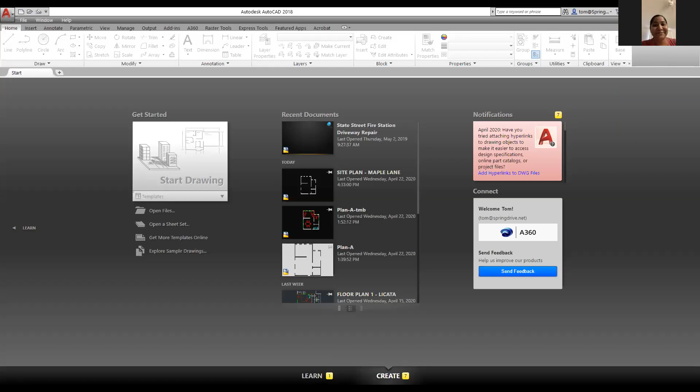Okay, let me ask you a question, Padma. I think you'll know the answer to this. Now let me ask you this, Padma, do you know what a database is? No, sir. You don't? Okay, all right. Well, let me explain what a database is, because if you don't know, then it's probably something that maybe... does anybody know what a database is before I go on with this explanation?

A place that you store data? Yeah, exactly, it's where you store data. You know, don't all jump at once, you guys. And the thing is, it's where you store data. It's kind of like this, let me give you the most simple example. Okay, here it is like this.

What happens is every year, Christmas time comes along, or it comes along in April too, like I just mentioned. But when I am going to send out my Christmas cards, what do I do? Do I go and look through a telephone book and look up all the addresses? That's maybe some old piece of paper thing. Used to do that, but you know what I use now? I use an Excel spreadsheet. And the Excel spreadsheet tracks the information like this.

You have one column that would track the last name, the next column would track the first name, the next column would track the street address, the next column would track the city, the next column would track the zip code and the state, and then the next one would track the phone number. Now, what is that? That's a database. What it means is it's tracking data.

I'm going someplace with this. Now let me explain something to you. When you're working with AutoCAD, AutoCAD is a database with a graphic front end. That's really all that's happening here. So when you're working with AutoCAD, everything is mathematically calculated and presented to you through a graphical front end, but really it's just a database.

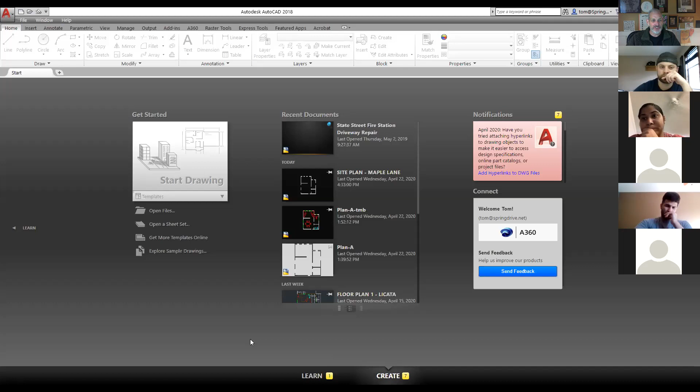So anyway, getting back into this right now, we're going to go ahead and talk about this. So now what we're going to do is we're going to go back out to where we typically go, which is going to be out here. And what I'm going to do is I'm going to go out here to Blackboard. Let me make sure you guys can see this. I'm going to do new share, and I'm going to share to Blackboard. Okay, you guys should be able to see Blackboard right now. Can you see Blackboard right now? Yes, yes, okay, so I think we're seeing Blackboard.

Okay, I'll go out here, and what I'm going to do is I'll start this off the same way you guys have been doing it. Yeah, right there, and I'm going to go here, if I can get there. Yeah, right there. Okay, so what I'm going to do right now is it should bring me up onto this area here. Just give it a second, and it looks like it's kind of, yeah, there we go. So this is what you're going to see right here.

Now you're going to notice right down here, you've got April 22 blocks, and I'm going to do this. I'm going to go ahead and put a little notation on here. I'm going to go ahead and put a highlight on here. Okay, over here you see it says April 22 blocks. That's what we're working on tonight.

So going back to here, I'm going to go ahead and click on this. When I click on that, it brings up the content. All right, and here's, come on, where's the content? Where is it now? Okay, let's see here. Okay, guess I'm going to have to do this. Go back to the mouse and go back to the blocks. Okay, it's taking a second. For some reason the site's a little bit slow tonight.

I can't imagine why, but you've got blocks assignment, and this is actually the same thing, it's a PDF, the same thing I did before. So let me show you what it looks like. So I go ahead and open this up right here, and this is what it is. So first of all, you guys are going to want to download this. Okay, this is what we're going to create. We're going to be creating this right here. This right here that you're looking at is actually going to be like a little 5-page document, and we're going to be making this. This is all going to be done out of blocks, okay? So let me do this real quickly.

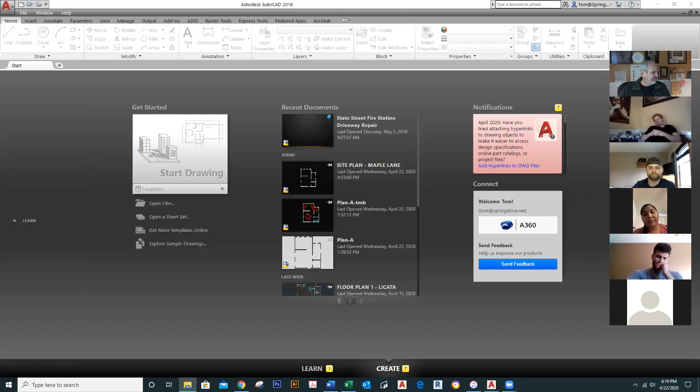So what we're going to do right now is open it. I'm going to open up that file, which should be out here in my downloads. Let me go ahead and grab this if I can, the site plan Maple Lane. Okay, it looks like this. Now, what I've got right now, this information right here - if I click on this, it tells me what layer it's on. It's on the walls layer.

So what I want to do now is insert some blocks. Let's take a look at what I was showing you guys before. If I pull this back up here, if I can find that... it looks like that didn't really find it. So I'm going to try real quickly to get this to download here if it works, hopefully it will. I'm going to try to open that up there. All right, one, two, three, there we go. Go ahead and do this again.

Okay, so there that is, it's still trying to open up there. Now, what we're going to do right now, you'll notice it's got these different items right here. I'm having a real difficult time with this because it's really slow, not sure why, and I can't even open it up. So that's where we're at right now. Shouldn't be, but that's the way it is. Anyway, so this is what we're going to be working on. This isn't even showing up yet, so that's just going to have to wait for a second here.

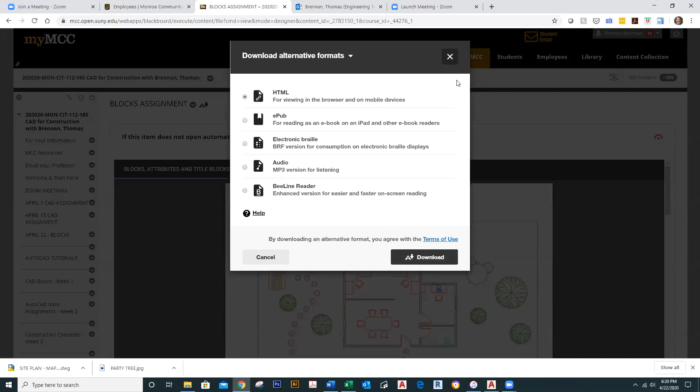So what you're seeing right here, we'll just start with a real simple part, which are these windows. You see it's got windows around the edges here.

So let me talk about what a block is. First of all, a block is something that allows you to put information into a drawing repeatedly. What this means is that you've got the ability to insert, let's say, a piece of furniture, or a door, or a window, or something else.

And these blocks are actually manufactured by companies. When I used to work back in Michigan for a hospital called Beaumont, which has about 1,000 beds, so it's really big - a lot bigger than Strong and Highland put together. It's really huge, the largest single campus hospital in the country. And I used to work there, and one of the things we used to do is lay out furniture.

So when you lay out furniture, one of the things you do is you put in blocks. Now I talked about blocks a little bit for you guys, but now we're going to get into actually how to make these work and how to insert them and so forth. So let me show you how this works.

So getting into blocks right here, I'm going to get into this. And as I get into this right now, I'm going to go down to here and back. Can you guys see AutoCAD right now?

Yes. Okay, so what I'm going to do right now is I want to insert this. Now, please notice that whenever you're working with AutoCAD, one of the things you want to do is always be mindful of your layers. And the reason why is your layers allow you to keep the information as it should be. Now, let me show you quickly what an object, what a particular item could be, as far as a block. A block can be anything you want it to be, but let me give you an example here.

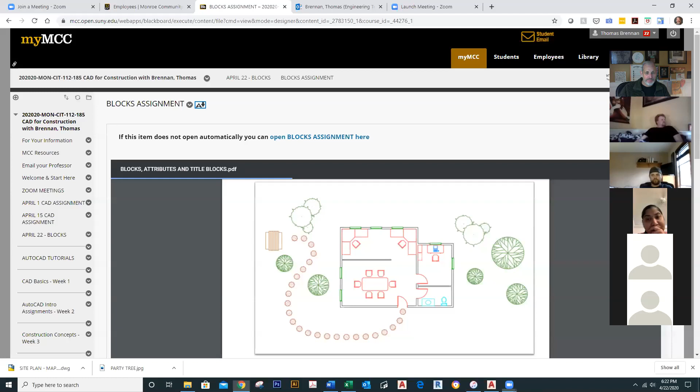Let's say I was laying out furniture right now, and the furniture I was laying out was actually going to be for Steelcase. So what I'm going to do is go out here and share something else. I'm going to do a new share, and go out here... let's see if I can grab this. Can you guys see Google right now?

Yeah, okay. So I'm going to type in here - this is actually going to be very instructive - Steelcase blocks, Steelcase CAD. Okay, so we got a Steelcase CAD. Now what's going to happen right now, this is what we used to do before. I'm going to look for a CAD file, and this CAD file is going to be any particular thing that has to do with Steelcase furniture.

So this is what we used to do. I'm just going to go to task and vintage, task and visitor seating, and I'm just going to go ahead and choose gesture. Let's see what this looks like. Okay, I've got these right here, standard. Can you guys see these chairs here? Yeah.

Okay, so I'm going to go ahead and open this up, and what I'm going to do is download this drawing right here. See, it says CAD symbols - I'm going to go ahead and download a CAD symbol. And it just came in down here, so I've got that right down there, 717 and some change.

And now if I want to insert that into my drawing, I can do that by just going back. Can you guys see AutoCAD now? No. Okay, let me go back to new share and go back to here. Can you guys see AutoCAD now? Yes.

Okay, so what I'm going to do is go ahead and insert that. So to do that, I'm going to grab this and pull it into my drawing. Now watch this - I drop it in, and right there you see it. Boom. Okay, now there it is right there. I just went ahead and inserted that, and that is now in the drawing right there.

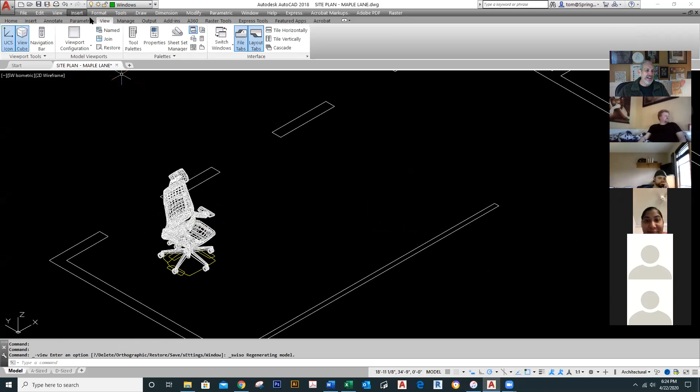And I'm going to just go ahead and take a look at it, Southwest isometric view, and there it is. Boom, pretty cool, huh? So at that point right now, I could actually go and change the visual style and take a look at this as conceptual. When I do that, it gives me that look right there, so that's a 3D item, showing this particular chair to me in 3D.

Now, so what's the big deal? Why is this important? It's important on a lot of levels because first of all, I could use this particular block, which is a standardized block that Steelcase themselves put together. So when I lay it out, it's going to be the actual furniture measurements, actual perfect measurements and configuration like you see right there. So that's what we have.

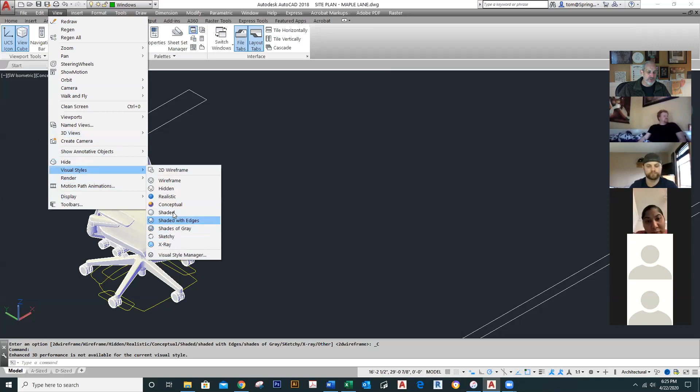Okay, now the next thing I'm going to do right here is go a little bit further in the visual style. I'm going to go to realistic if I can do that. Yes, I've got that, and there's a few different ways I can look at this, but for right now, that's what you've got right there. So we've got that, and this information right here is now available for me to use.

So what's the big deal? Well, the great thing is I can just go ahead and use this over and over again. So if I want to put this in my drawing, I put it in, and look at this, I can actually take it and rotate it. Kind of cool, rotate the chair around like that. I'll go ahead and grab this, put another chair right here, and rotate it around like that. So what's the big deal? Well, the big deal is that this allows me to have great flexibility, the ability to scale and rotate these items as I put them together like that.

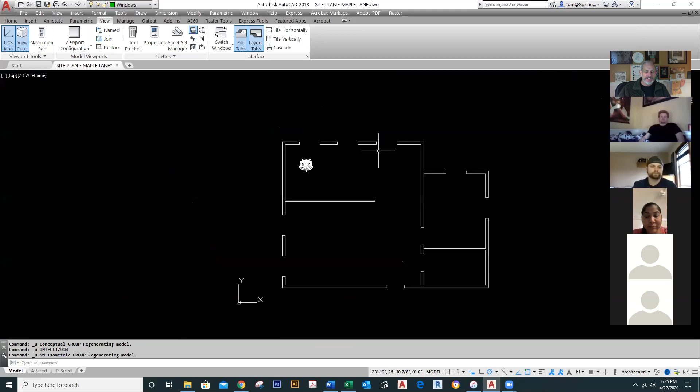So anyway, that's what a block is. We're working with 2D, so that just gives you an idea as far as what 3D would do. I'm just going to step backwards a little bit here, go back to here, and now we're back to there. So what I saw is I could do that. Now that I have some idea what a block is - a block can be any number of items all combined together that could be used in a drawing - the examples I gave before are windows. In the last project we worked with, I actually gave you guys some window blocks, and I also gave you guys some other items right there. So we're going to work with blocks right here, and then we're going to look and see how to make them into attributes. So let me show you something else right now.

So now how do we do this? Well, first of all, you'll notice right now that I've got windows as my current layer, and that's cool. I'm going to go to the insert tab right here, and go to insert. Now look at this, when I go to insert you're going to see there's a number of different items here, one of which is window. Okay, so watch this, I'm going to click on window.

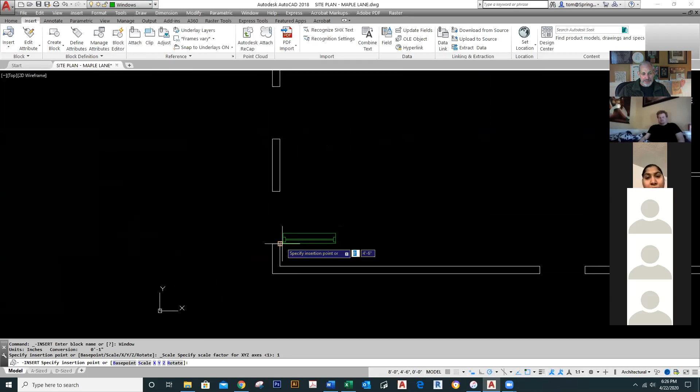I'm going to pull into here and place it right here. Notice I'm snapping to that because I've got my object snaps on. So I click there, and then I can rotate it - it lets me rotate it in any direction I want to. I just want to rotate it up in this direction and click. Now once I've done that, boom, that is in place right there. That was easy to do. So I went ahead and did that.

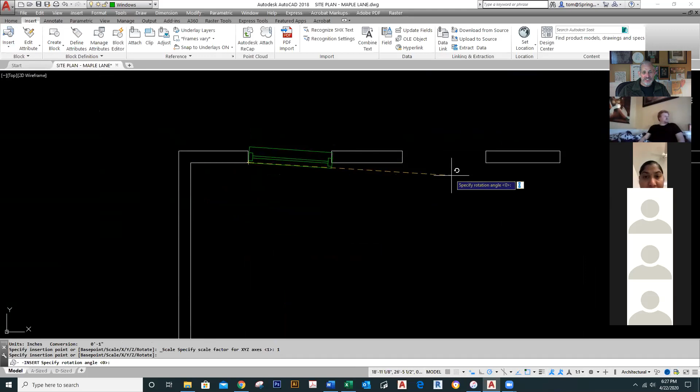So I'm going to go ahead and repeat that. Go back to here, insert, window, do the same thing right to here, click it there, pull it up and go there. So this is how I begin to put the windows in. As I'm doing this right now, it's all up here under insert. Go to window again. Now this one, I'm going to click, and now it's asking me for rotation. Let's go ahead and snap it over to the side here so it stays straight there. And this is how we go ahead and put this together.

So you have the ability, as you're putting these elements in, to go ahead and place them. AutoCAD allows you to place them, as I'm doing right here, just placing them in a row. Okay, so I got those, then I got another one, insert. You could also use the copy tool. I'm going ahead along here, putting that in place. And then I got one more down here, insert, and insert this window. I'm going to put this one in like this, click on it there, and then pull it down like that.

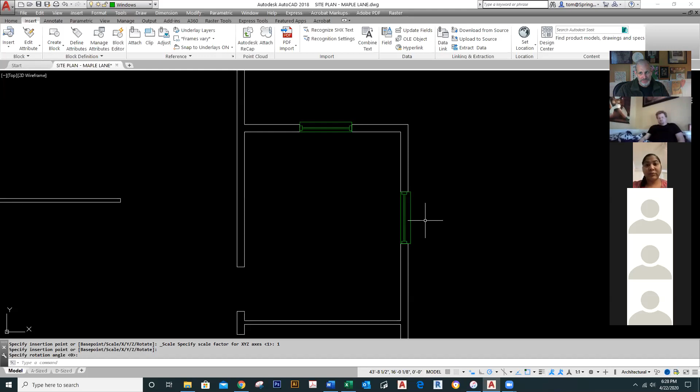Now, what I did right here is I left the longer portion sticking out. That could go either way. In this case, I'm leaving them there as if they were like a window head, like the architectural feature that's actually on the outside of the building, like in colonial type construction, where you have a window head that prevents water from getting into the window. That also could be a sill that faces out towards the outside, or a sill that comes in. I'm just going that way right now.

Okay, so what's the takeaway? The takeaway is that you can insert blocks, and as you insert them, you have the ability to rotate them, scale them, and put them in position. The windows are easy because I don't have to do any scaling on those, so those are pretty easy. Any questions about that so far?

Okay, all right, the next thing we're going to work on, now that we've done that, is getting back to what I had worked on before and what I had shown you guys. If I can get out there, I think I can, I'm going to go back to my new share and go out to here, and I should be able to open this up. Okay, and I'm going to go back to here, and we're right here, and this still has not come down. That's crazy.

Mr. Brennan, do a lot of companies put blocks on their site so you can go there and get them and import them into your drawing? Yeah, it's very common, most companies do them. I just showed you Steelcase because they're a huge company, you guys have all heard of Steelcase probably. They do it, Armstrong does it, I think IKEA does it too, so there's just a lot of different companies that do this stuff. So yeah, the answer is yes.

And that makes your life a whole lot easier. Also, for those of you who are going to be getting into Revit, they make Revit families in the same way, so it's something that is very, very useful. But yeah, it makes your job a lot easier.

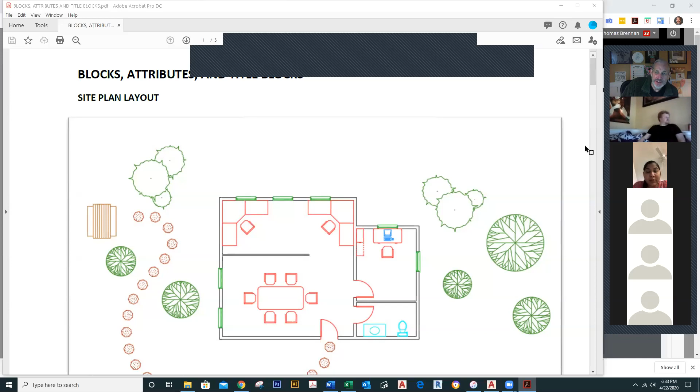I'm going to grab this right here. You guys probably can't see this, so I'm going to share this one right here. Okay, so can you guys see this plan a little bit larger now? Yes? Okay, thank you.

Now what you got going on right here is we put in these items—we put in all the windows, okay, and they are green because the layer is green. So I went in and put those in, that's one thing, pretty easy. Next thing we're going to do is the furniture—we're going to put in all these different furniture items right here just to show you how that works. And then we'll work on the bathroom stuff.

So let's go ahead. Now memorizing this, you've actually got a corner unit here, a corner unit here, and some chairs, a table here, chairs, and then you got some furniture up in here. So I'm going to go ahead and start to work on that.

I'm going to go ahead and go back to AutoCAD over here. And you guys should be able to see AutoCAD. Can you see AutoCAD now? Yes, okay, great. So now what we're going to do now is getting into this right now.

Next thing is this—I'm going to go ahead and work on putting in the furniture. First of all, I'm going to change my layer to furniture. Now watch this—I go to furniture, and what I'm going to do is insert some. So I go to Insert, and down here I've got furniture. What furniture do I have? I got a desk unit.

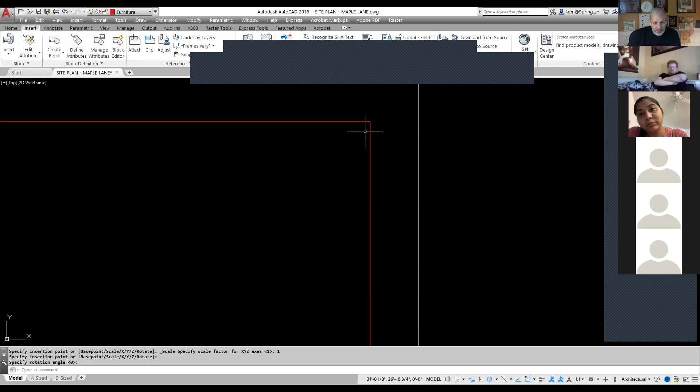So I go to this desk unit right here, and I'm going to go ahead and drop it right here. Boom. And I'm going to go ahead and take it—you notice right here I can go ahead and rotate it any direction I want to, okay? Go ahead and drop it right there, and boom, it shows up in the corner there. Looks good. All right, and then go back over to this side, and guess what I want to do there? Same thing. By the way, where I'm going right here, you got the Home tab, you got the Insert tab, okay?

On the Insert tab over here, on the far left, you've got a little insert item right here. This is where all your blocks are. You can see the gallery, it's called the block gallery. So I go here, I use desk unit again.

Now watch this, I can go ahead and click it here. When I do that, I can go ahead and rotate it around this way. Boom, locks it in there. So I've got those in place, okay? And basically you have a lot of control over this as long as you do it the way I'm showing you.

Now back to insert again. By the way, here's something to look forward to. Once you guys get into AutoCAD 2020, there's this really cool feature called the block palette. That's actually way cool, it's a lot better than this right here. But anyway, this is still pretty good.

So next thing we got right here is a chair. Where is my chair? So I scroll up. It's all alphabetical, I got a chair right here. So I'm going to click on chair.

Now what I'm going to do is I'm going to drop it here, and you notice that it's going ahead and allowing me to rotate it at different degrees of 45, different increments of 45 degrees. So I'm going to drop it and leave it there. Now you'll notice it doesn't look very good there.

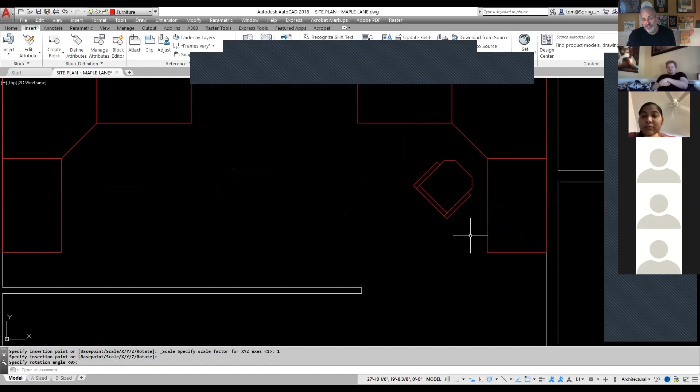So I'm going to show you a little secret here. If you click on a block, you'll notice that its grip shows up. Now you see the grip right there? It's that blue square. If I hold my control key down, now watch this, okay? Here's my hands—this hand is now going to touch the control key. I am now holding down the control key with my left hand.

Now I have another hand. This other hand I'm going to use to hit my arrow keys. And when I hit the arrow keys, I can use what's called nudge mode. That's right, it's called nudge mode, folks. Nudge mode allows you to kind of nudge that into a position like that. Now I've got that in position right there.

And what I could do is I'm going to show you something kind of cool here just because, why not? So here's where I'm going to kind of start to pull some things out of the bag of tricks here to make you guys some power users. And you can go back.

Question? That nudge move is probably a lot more accurate than just the move command, isn't it, you think? Actually, the move command allows you to be more precise, but if you just need to move something a couple pixels, the nudge mode's the way to go. Nudge mode. Okay, thank you.

Yep, so anyway, so now watch this. Okay, now I'm going to use the mirror command. This is something—at no time do my fingers leave my hands. Okay, watch this, it's CAD magic. But I'm going to show you guys how I can go ahead and mirror this thing over to here.

Now watch it, so I'm going to go over to the Home tab, back over to here, and here's the mirror command. Mirror command's right here. Same thing we've been working on—two triangles facing each other. So I go to mirror, I click on mirror.

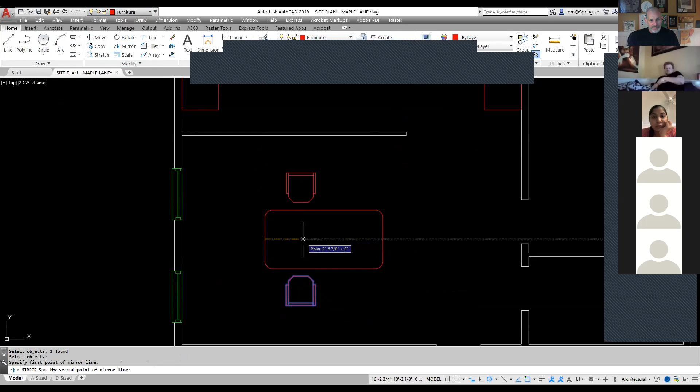Then I'm going to mirror it again. I'm going to grab this and this, and mirror it again right from here. Boom to boom, like that. Okay, and then I'm going to do one more thing.

I'm going to go ahead and take this, and put in another chair on the far end here. I need to make sure I find it. I'm going to go ahead and touch it here, pull it on over, and then rotate it like that. We got that. And then I'm going to mirror it one more time. Mirror this, boom, go to here, boom, and mirror right down to there. Okay, so this is how we do that.

Erase source objects? Nope, we got all that. So those are looking pretty good here. Now that I've got that right there, I'm going to turn my attention - you guys can figure the rest of these out, they're not too hard. But let me show you something else here: doors. Doors are actually using a different kind of block.

The block that is being used with doors is called a dynamic block. A dynamic block does something other blocks don't do - it gives you a lot more editing features. Watch this, and I'll show you how this works.

Is that when you change the size of it and rotation, or the number of degrees? Yeah, you can do all that with this, exactly. Yeah, I had to do that today. Well, you're going to be seeing it again here.

So we're going to go down here to our door layer. Now check this out, I'm going to go to insert, and I've got a door, right there. Now watch how I'm going to do this.

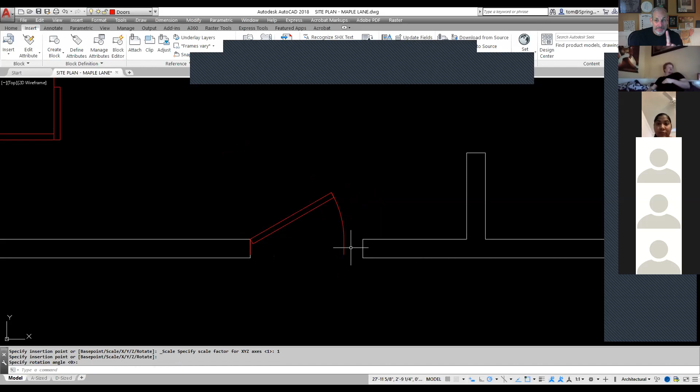Now at this point it looks like a normal block, except let me show you what happens when I click on it - boom, there's all these other grips that show up. I realize some of this might be review because I showed you guys some of this already.

But the first thing I want to do is open up the door so it's 90 degrees, because that's what I actually have in my other drawing. So I click there, and now it's open 90 degrees. Let me show you that again - I click on this, change to 30 degrees, then 45 degrees, then 60 degrees, in increments of 15 degrees until you get up to 90.

Okay, so that's one thing. Next, I'm going to click on this - this controls how wide the door is. It can be 2 feet, 2 feet 4, 2 feet 6, 2 feet 8, or 3 feet. And 3 feet actually fits this example quite nicely.

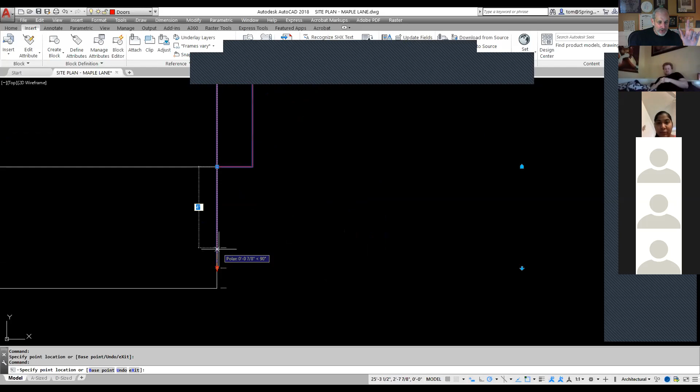And then down here I can control the width of the wall - it's either 4 inches, 5 inches, or 6 inches. I go down to here, that's a 6-inch wall. I got that there, I hit my escape key, boom - that door is now in place. That's how we do that.

I'm just going to do one more here to make it clear. I'm going to go back to insert again, insert door one more time. I want to pick a point right here, click there, and drop it right like that. Okay, so now I've got this, I'm going to do the same thing, click there.

You guys know what the deal is - I'm going to go to there, easy enough. I'm going to go to here and pull this down to there, 6 inches. And then over to here, I'm going to take this and drag it down, and we're good to go like that.

And that is how we do those, and you guys get the idea, but just for repetition I'll do it one more time. I'll take this - let's see, I could do it here. And you always want to make sure that it's... oh, that one doesn't look so good. Let me just do that, see how that works. That's not going to work so well, is it? Boom, like that - nope, nope, didn't pick the right place.

So that was a train wreck, we'll get rid of that one. I'll go ahead and go back to here, insert, go to door again, and go over to this location here.

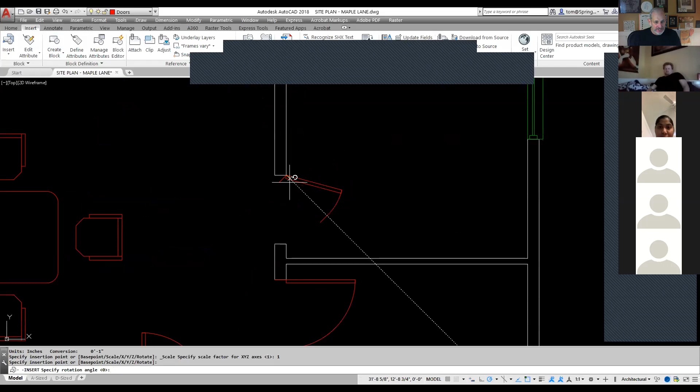Click there and pull it down, boom, there we are. I'm gonna click on this, and you know the drill - I'm gonna go to here. This grip allows me to change the look, so I do that. Then this grip allows me to change the width, and I go like that. Then I want to have the thickness of the wall, so I click on this grip and go 4 inches, 5 inches, 6 inches, like that.

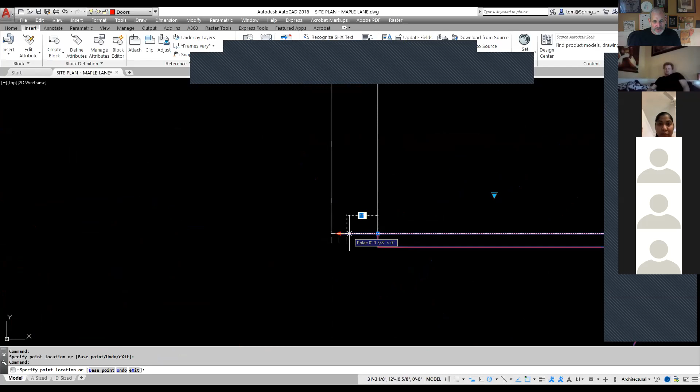Now once I've got that, one more thing is it's not swinging in the right direction. So guess what? I can swing it like this by hitting this grip here. So I go ahead and do that. Okay, so that gets those together. So that's pretty much it.

The last thing I'm going to throw in here is the plumbing, because the plumbing has a similar situation going on there. So plumbing right here. What I'm going to do is insert the sink and insert the toilet. I'll start with the sink - where is my sink? My sink is here. So I'm going to start with sink.

Now here's a cool trick. I can go ahead and touch it here and drag it along. When I'm dragging along, it lets me pick a point right along the wall. I can drop it. Then I'm going to do the same thing - grab the toilet block right here, also in some places called a water closet. So I can go ahead and go up here and pull this down like this. Boom, like that, and drop it there.

Now, what's wrong with that picture? What's wrong with that? Oh, it's the wrong view. It's giving you an elevation view, but we're in a plan view. So guess what, this has got a little grip here - it's a dynamic block, so I can click here, and I've got a plan view, elongated plan. Watch what happens when I do this. Boom, now that looks a whole lot better, doesn't it?

So now this allows me to rotate it - this is a rotate grip. I'll click on this, and I can rotate it around. Go ahead and rotate this around and pull it straight up. You can just use a standard rotate command too, I'm just showing you how the grips work.

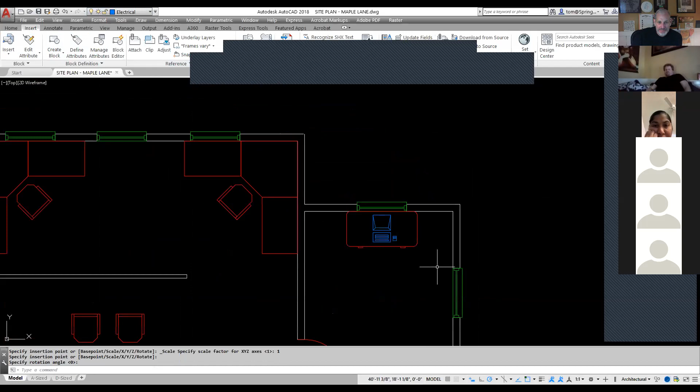So I'll go to here, and I'll go to furniture again. When I go to furniture here, I'm going to insert the file cabinet. I'm going to go to here and click on this, and I pull this, and go ahead and drop that in. And that takes care of my furniture.

So what do I do? I save it. And I'm going to save it as - file, save as, site plan, Maple Lane - Brennan.

So I went ahead and saved that. So I got that in place.

Now the next thing I'm going to show you is, as we go along, it looks like this. I've got some trees and so forth in here, I've also got a picnic table, and I've got these right here, some stepping stones that are actually kind of evenly spaced apart here.

Well, how do you do that? I'll show you how I do that. I'm going to go kind of fast on this, but you guys can look it back up on the video and watch how I do this. It's actually very cool.

So what I'm going to do now is put this together. I'm going to place it in, go back to here. I realize you're not seeing my screen right now, but that's okay. So I'm going to resume the share, go to new share, and go back over to here. Can you guys see AutoCAD right now?

Yes, okay thank you. All right, so now what I'm going to do is change my layer to planting. I'm going to go ahead and put some trees in here.

To do that, back to insert, I'm going to grab what I've got here. I've got a deciduous tree. I'm going to click on this, and this one fits pretty close to out here, so I'll go there. You notice I can rotate it, so I'm going to go ahead and drop it like that.

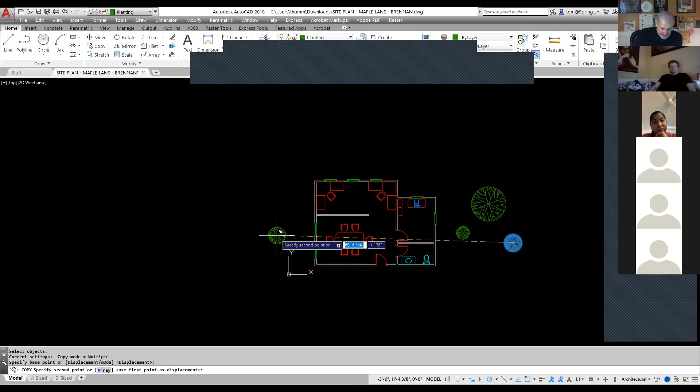Now that I have those, I'm going to copy them over to the other side using my copy command. The trees are both basically similar in size, but I'm going to drop one somewhere right over in this location, and put another one right here. Then I'm going to scale that so it's a little bit smaller.

So I'm going to scale this one and make it about 0.7, like that. So I've got that. Now what else do I have here?

I've got a couple of clumps of trees here. To do that, I'm going to insert my clump of trees. I've got a clump of trees right here. I'm going to put my first clump somewhere right up in here. You can go ahead and drop it, and we'll go ahead and hit that.

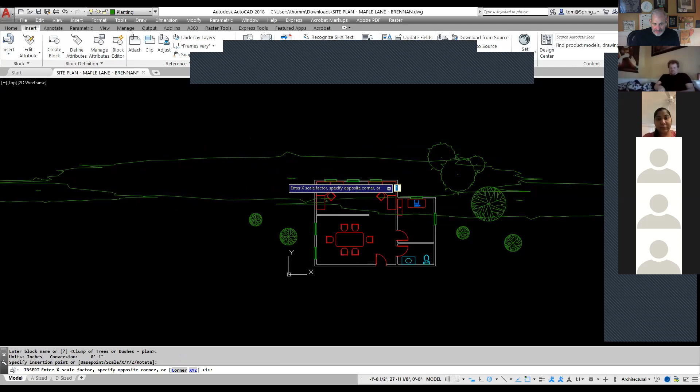We'll go ahead and put another one here. I'm going to pick a point like that, and go ahead and do this and drop it somewhere like that. I'm just going to move this around here, like that.

Okay, now the next thing you're going to notice on the plan that I have here, just to show you how this works, I'm going to go back to here. What do I have besides this? Can you guys see my layout right now? Yes, okay, so what I've got right now is I've got this right here.

I've got a picnic table. What's that? When you nudged that group of trees there, was that control and then arrow?

Yeah, control arrow. You click on the object, and once it's selected and the grip is highlighted, you hold your control key down and hit the arrow keys. It's called nudge mode.

Okay, so now that I have this, I want to put in this picnic table, then I want to put in this path. I'm going to show you how to do this. It's actually pretty cool. This is what's called a path array, and this allows me to set these stepping stones along a spline that I defined.

Okay, so back over to here. I'm going to go to new share and go back over to AutoCAD. Can you guys see AutoCAD?

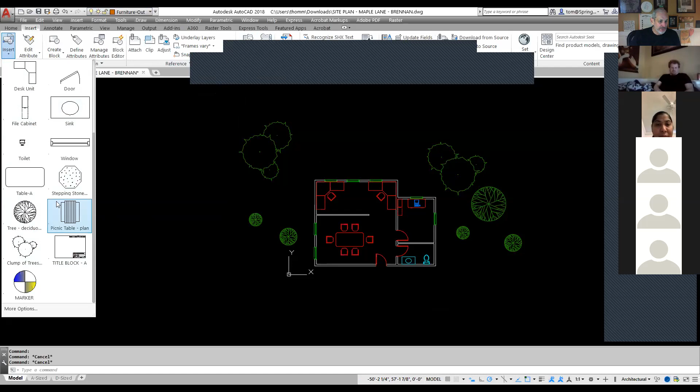Okay, so I'm going to change my layer to furniture outdoor. Guess what my outdoor furniture is? It's my picnic table, which is somewhere along here. There it is, picnic table. I'm going to take my picnic table and park it right here and leave it right there.

Now what I'm going to do is place in one of my stepping stones. So I use the hardscape layer. I'm going to put in a stepping stone, start it right up around here, just drop it right there, and we'll go ahead and leave it there.

Okay, now here's the next thing. This is where layer management is really important because I'm going to draw a spline, and I want to use a layer that's not going to get in my way. So dimensions—nothing else is on my dimensions layer at this point, so I'll use this. Now I'm going to make a polyline.

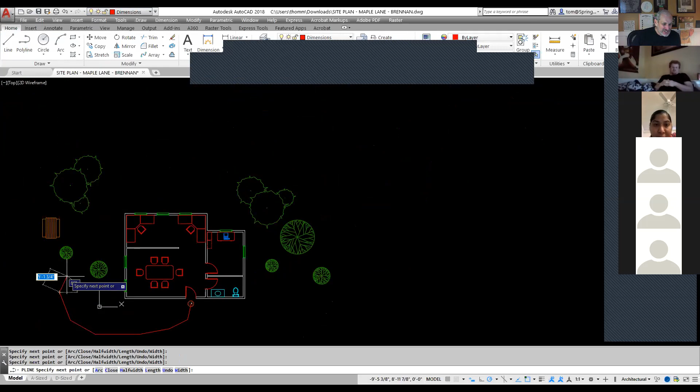So to make a polyline, I go to here. Now watch this, I'm going to start and make a polyline. I'll pick a point somewhere here, and watch what I'm going to do. I'm going to go ahead and make a polyline, so I go along here. Now this right here, the applications for this are myriad—you can do so much with this. It's actually pretty cool. I'm just going to go like this and kind of do that. Now once I've done that, that path, although it goes to the right location, it's not very smooth.

So if I double click on it, I can then use the spline command. Spline it—now watch what happens. Boom, I spline it, and then I've got that in place right there. So that's pretty good now, doesn't it?

Now what I'm going to do is go back to my other layer, which is going to be my hardscape layer. And now I'm going to create what's called a path array. The path array allows me to pick a certain object and a path for it to array along. So I'll go to path array. Now watch this—if you guys get a hold of this, it'll make you a rock star wherever you work.

So I'll go to here, I'm going to click on this. All right, I right click. Now it says down here, select the path curve. The path curve is here. Now watch what happens—boom, all right?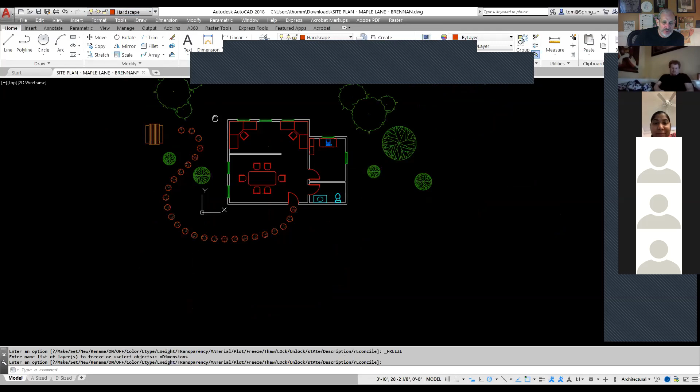And those are automatically spaced a certain distance. In this case it's 3 feet 6 and a half inches. I can just go ahead and say 3 feet right there, and when I do, they're now all aligned. And those are all set up in such a way as they're all moving in that direction. Then I'm going to turn off my dimensions layer, and boom, there you have it. That is how you would go ahead and use blocks to create a complete and very legitimate type of thing right here.

Looks like I've got someone talking over here. Okay, very good, see you Ian. We'll talk to you. All right, so we're good to go here.

So now, before I move on to the next thing, any questions about this? Is this going to be due like for next week? Yep. Okay, this won't take you long at all, this is a piece of cake, this is easy, it really is. And the thing is, this last little bit here, you'd be surprised how fast it goes—that took me about 30 seconds to do.

Professor, for the tables and chairs, do we need any dimensions or measurement? No, you're just going to eyeball it. Oh okay, thanks. Well, you're going to use snaps though. Most of these things are snapped, but like for instance this table right here, it's just got to be placed by sight. These objects right here should be aligned along the wall, but that's about all for those.

Okay, what do you mean when you say you got to use snaps? Object snaps, endpoints, midpoints. Is that something you find down below the screen? Yep, that's something we turn on and off. Yep, that's right here, it's all this stuff right here. Remember this?

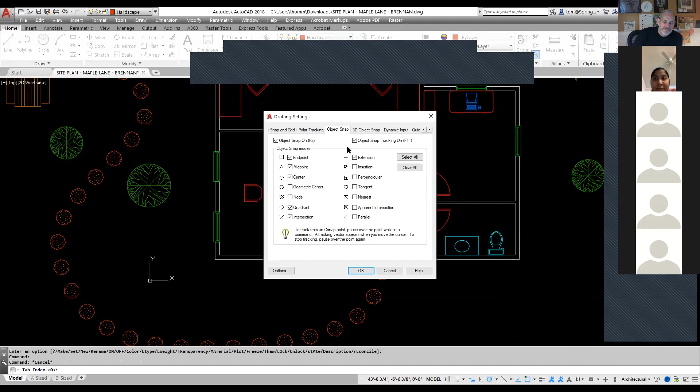No, yeah, we went over this. Does anyone else remember it? I hope so, this is something we went over several times. But yeah, these are your object snaps. Okay, I'll work it out. Actually, it's the very first night I talked about the AutoCAD tweaks - that's one of the things right there. So if you go through everything I've given you, you'll have no problem with that.

Okay, so let me put a bow on this. What I just did is I went ahead and created a block diagram like this. What I'm going to be giving you is essentially just the building layout, and you guys are going to put these blocks in position, and put them on the correct layer. Boom, done, that's all you got to do. That's not too bad. However, we're not done - there's more to this, because I can't just leave it there.

Now the next thing - once you've done that, that's all blocks. So you'll notice that on the sheet I have here, we have something else, and that is called block definition. So let me go to here and talk about block definitions. We got that, that part is not going to be hard. All right, now back down to here.

What I'm going to do is move down to here, and we're going to define a block here. Now the block right here looks like this - it's a circle, you guys can draw a circle. It's 2 lines, you can draw lines too. And then it's got some hatching - I showed you guys how to do hatching. So this is going to be easy, we're going to make a block out of this.

The block is going to be - we're going to define a block, it's going to be called marker. And we're going to give it a base point, and we're going to select the objects. Okay, I'm going to show you how to do this. So this is what it looks like over here, this is what the marker looks like. And then we're going to name it, pick a base point, and select the objects. That's all you have to do.

So now that I've got that, we're going to make that up, and then we're going to probably take a little break here, we'll come back because I got a good amount more to show you. So back over to here - what I'm going to do is start by changing my layer to 0. The reason why is, for you guys right now, drawing your blocks on layer 0 gives you very predictable results. That's not a hard and fast rule, but it's something I want you guys to do for right now.

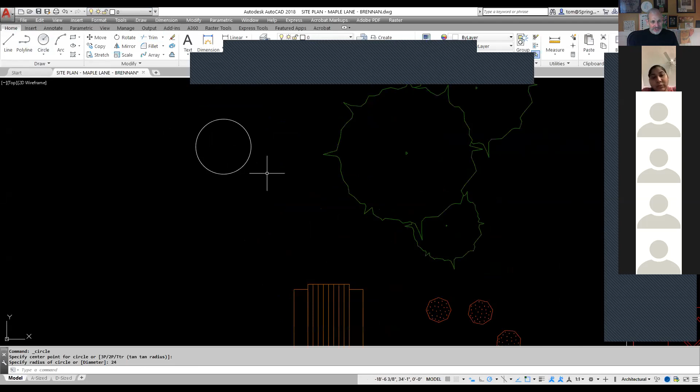So we're going to start with here. What I'm going to do right now is zoom over here, and draw a circle. Go to circle, pick a point, and I'm going to use 2 feet, or 24 inches, as the radius. Boom, like that. So now the next thing I want to do is draw those lines around from point to point. Now over here, these are what are called the quadrant points right now - the north, the south, the east, and the west.

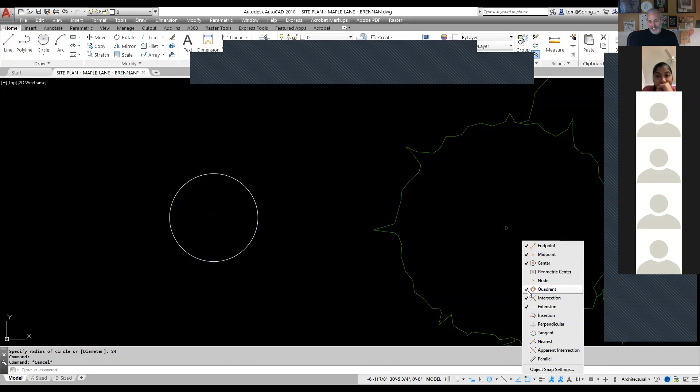So to access those, I'll go back down to here to my object snaps, and I want to change it to quadrant. Now you notice quadrant I already have turned on, but quadrant right here I can have it checked on or checked off. You want to check it on. Now once I've got it on, I can go from my line command, and I can go from here over to here. Then I do the same thing from the top to the bottom.

Here, down to there. And now the next thing I want to do is go to my hatch command. I go to hatch - now watch this. I got hatch, I've got gradient, and I've got boundary, these 3 options. I'm going to go to gradient. Now go to gradient right here, you'll notice that I've got this blue and yellow gradient. Watch what happens - it asks me right now, I take my hand off the mouse, it asks me to pick a point. Well, the point I'm going to pick right here is going to be here. I'm going to pick a point there, I'm going to pick a point down there.

So I pick those 2 points, and once I have, I can close the hatch creation dialog box. And I've got this object right here. So that's all it is, just a circle, 2 lines, a couple hatch patterns. And now I want to turn it into a block.

How do I do that? Well, to turn it into a block, we have to start the block command. Now, the easiest way to do it is you type the letter B, B for block, and hit enter. But there's another way to do it. There's about 5 different ways to do it.

We're going to go to Insert, and you've got Create Block right here. So I'm going to create block. You've got Write Block and Create Block. I'm going to go to Create Block and Shazam. This is the same dialog box I just showed you.

And we're going to name it marker, M-A-R-K-E-R. And then down here, we want to specify a base point. So we're going to pick a point. Going to click pick a point right here, and we're going to pick a point right here.

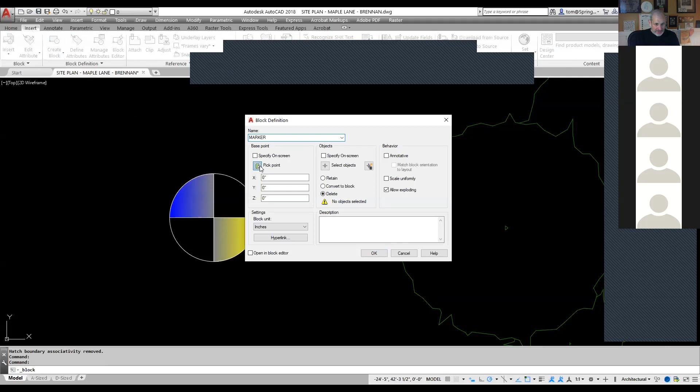Boom. And then we're going to select objects, so we're going to click on these objects. Here, I'm going to grab everything. Now, once I've done that, we've then selected everything, and you'll notice that it shows up right here. Okay, that tells you you've now defined it.

So 3 steps: you name it, you specify a base point. In this case, we use the center of the circle, which also happened to be the intersection of the 2 lines in the middle. You select your objects, you grab everything, and then you have this turned on to delete. The reason why is this will give you a visual cue that it's done.

So click on OK, and boom, it says the block definition has changed. Do you want to redefine it? Sure, we'll redefine it. Yep. Okay, so I went ahead and did that, and it disappeared. So what I'm going to do right now is that's gone. Now I'm going to insert it.

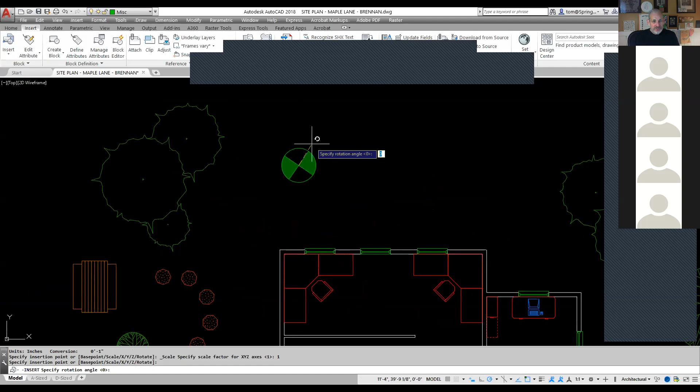Now watch what happens. I'm going to change the layer to something like, I'll just change it to miscellaneous. Now watch what happens. I go to insert, and you see it's right down here. You see marker now, I made that. So I click on here, and watch what I can do. Drop it, and I can rotate it around. You'll notice it's green because the current layer is miscellaneous.

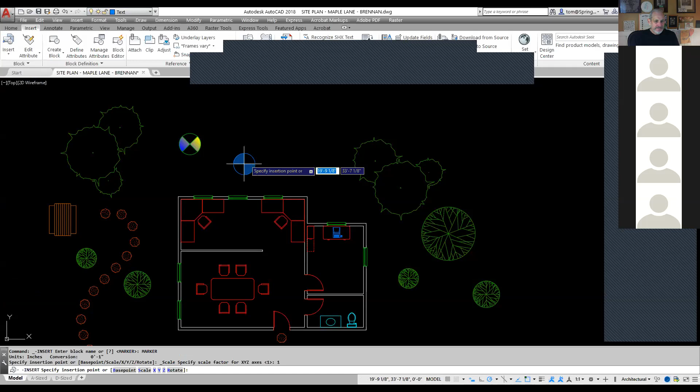And so in this particular case, the hatch maintains its blue and yellow gradient, but the green lines are used for the actual line work. If I change my layer to something else, let's say I'll just use text. And I'm going to go to insert and go to my marker again. I'm going to click here and pick a point like that. And then when I've done that, you'll notice it looks like that.

Okay, so what I just did there is I made a block. I made a block, and this is something that I want you guys to do too. You only have to put one of these in here, but I'm going to tell you a little story here as we get into this, because when you make a block and define it, there is a huge advantage to it in this sense.

If you ever need to change it, you can. This is where I mentioned my supervisor, Jim Vasquez, basically gave me this job and I was working on it. And then at that point, he came in to take a look at my work, and it turned out I'd used a certain block, and the customer changed their mind. But I spent like a whole week using the other block, and so I was like, 'Oh man, do I have to lay all this out again?'

And he said, 'No, no, no. All you got to do is redefine the blocks. I'm going to show you how to do that.' So to redefine a block, you double-click on it. Now, when you double-click on it, it brings up a prompt saying, 'Do you want to edit the block definition?' I'm going to say, 'Okay.'

And now what I'm going to do right here is I have this, okay? It brings in this gray area, which is like, ooh, scary, but it's really not so bad. You'll see it brings you into an editing location which gives you a lot of tools that are specific for doing things like dynamic blocks.

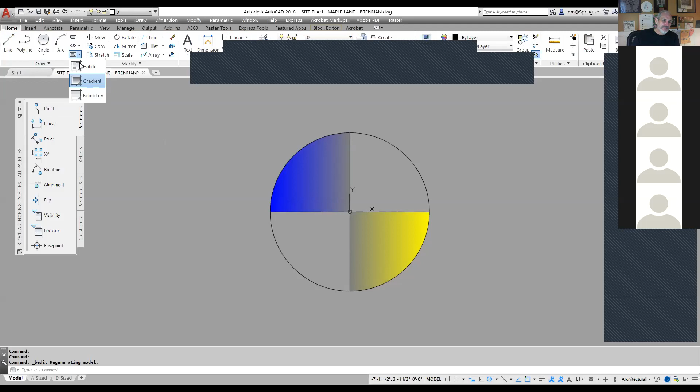We're just going to go to the Home tab over here, on the far left, and go back to Hatch again, use gradient again. What we're going to do is change the color from yellow-blue to something else. I'm going to change it from blue and yellow to blue and magenta, and when I do that, I'll click on the upper right corner, the lower left corner, boom, and it looks like that.

If it still doesn't look quite right, I can change around whether I want it to be centered or not, and I can change its angle. I can change how it's going to fit in there. Then I can close that, and I'm going to close out of this.

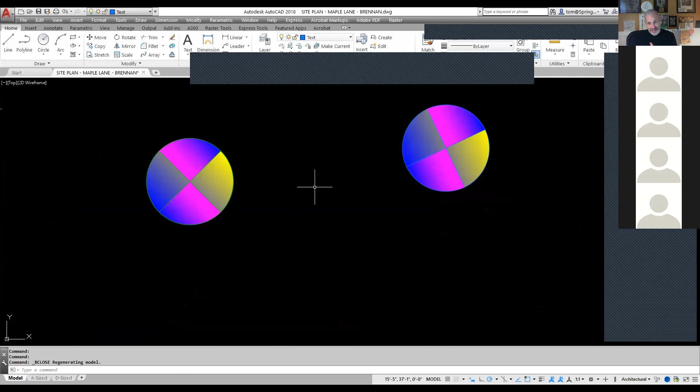It says, do you want to save it? Now watch what happens, I'm going to save the change and watch what happens. Boom, and now look at that. They now have that magenta on the other side. So I went ahead and redefined all the blocks all at once.

So that is the block section right here, that's the first part of this section. There's going to be a little bit more. We're going to talk about attributes, how attributes work.

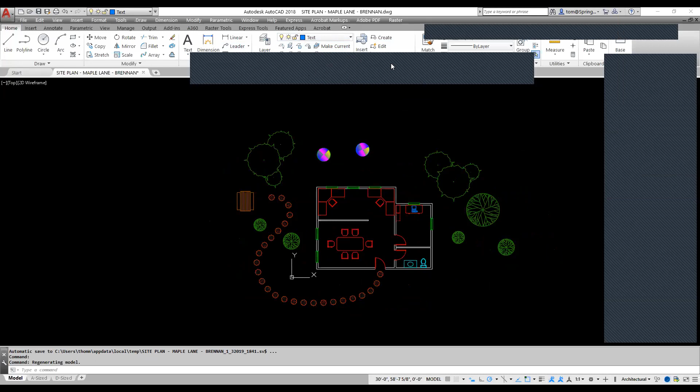So what we did is we covered how to make blocks, and then we also covered how to insert them, first inserting them and then after that how to make them. So we went ahead and did that, and here's the block that we made. Can you guys see this okay, the block definition, the marker? Can you guys see that?

Yep, yes, okay great. So going down to here, next thing is attributes. What are attributes? Well, attributes are essentially a means by which we can actually translate information in a drawing. So what we're going to look at is an example right now that could actually be used in a title block.

But before I get to that one, I'm going to make a little attribute just on this one right here. I'm going to use this marker, go back to the marker and show you how I would do this. I'm just going to go ahead and kind of wing this. I wasn't going to do this, but what the heck, we're doing this. I'm going to go ahead and do this, so I'm going to freestyle a little bit here. So I've got this right here.

So I've got this, and what I want to do right now is I'm going to explode this so it's no longer a block, just so that I can work with it. Now, when you explode it, it just breaks things back into its basic elements.

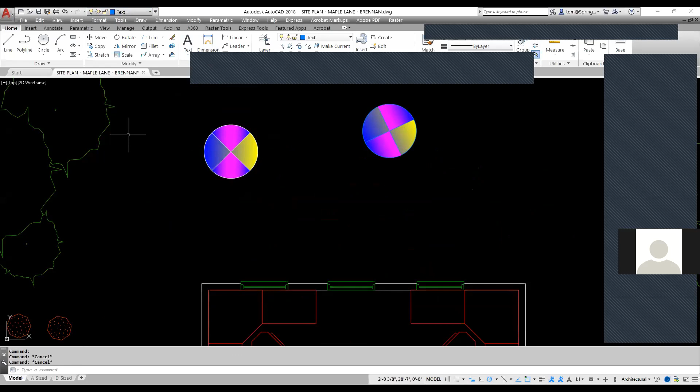And what I'm going to do right now is make what's called an attribute. So let me show you something here. To make an attribute, I'm going to use text as my layer, and I'm going to go ahead and make an attribute. So to do that, I go to Insert, and I've got defining attributes right here. So what's an attribute? Let me show you.

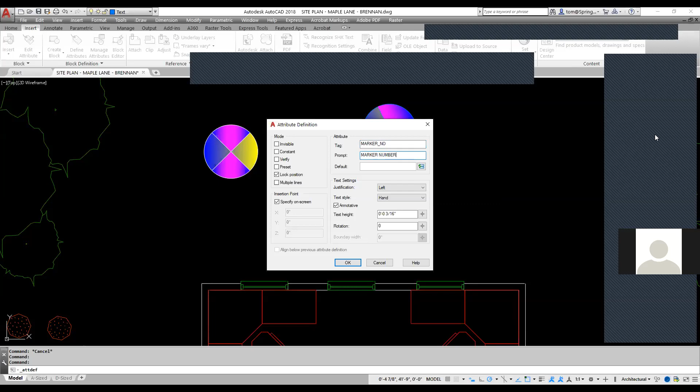So I'm going to make an attribute right here. I can actually define an attribute, and this is essentially a little piece of information that will be tracked along with this. So I'm going to go ahead and call this marker underscore NO, and then put this in here for marker number. So basically what that's going to do is define a field for me to track this information in AutoCAD.

Okay, move this one away from the shared. Okay, can you guys still see AutoCAD?

Okay, so what I've got right here is I've made this identifier. Now what I'm going to do is hit OK, and I'm going to take it and drop it right here.

Okay, now it's kind of small, so I'm going to scale it up a little bit. Oh gosh, what the heck? Make it about 3 times its size, 4 times. Still too small, so I'm going to scale it again and make it 5 times its size, like there.

Okay, so I got marker. So it's got marker number right here. Okay, so I've got that.

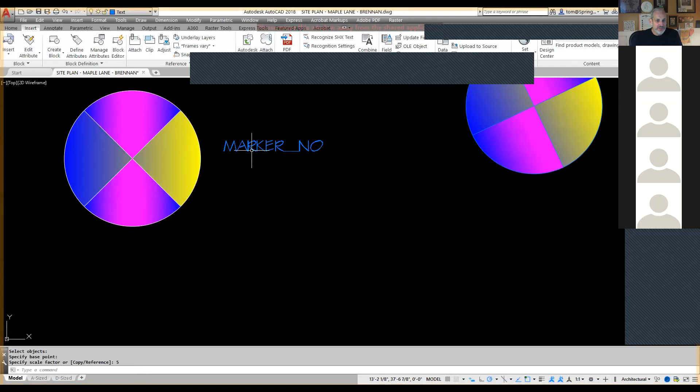Now what I want to do next is make another one. So let me check this out first, see what its size is now. What is its properties? What is its height? 3 3/4 inches. Okay, let's just make it an even 4. Properties, make it 4 inches. What the heck, 4? Okay, got that.

Okay, so as I put in another one, I've got that and it says marker number. I'm going to make another attribute right here, and I'll make this one say ATT-def. Instead of saying marker number, I'm going to say use - marker use, okay. And I'm going to say 4 for my height, and drop it right underneath this one. Boom and boom, so I've got 2 different identifiers.

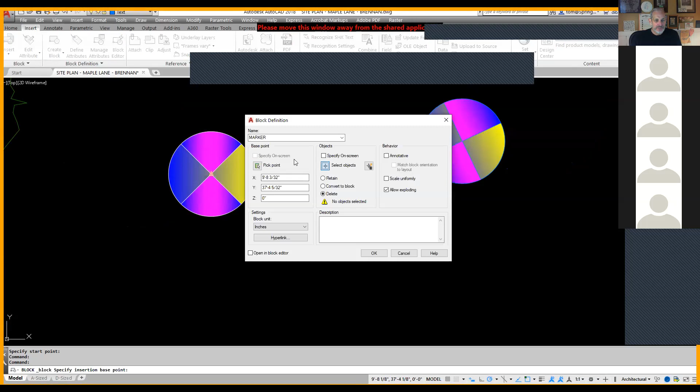Now, so how do I do this? Well, I make them a block, same way I did before. I go to create a block right here, and I'm going to call this one marker. Only now it's going to have this other information here. So I'm going to specify, pick the point right here, and then select the objects, which is going to be all this, and this, and this. So I got those, and now I hit OK.

Now watch what happens when I hit OK. It says, hey, yours is going to redefine this. Are you sure you want to do this? Well, yes, I do. So I click on that, and now at that point, that disappears.

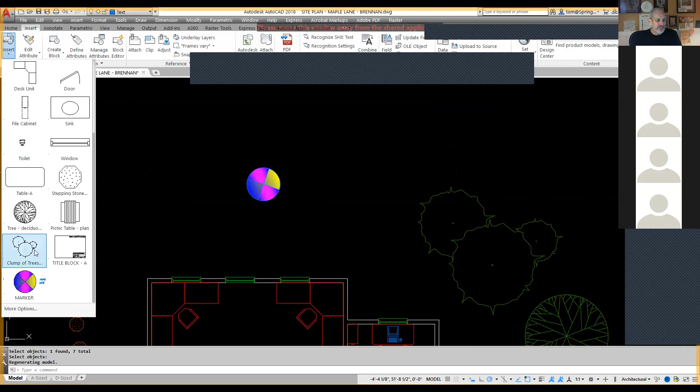Now I'm going to insert the marker. So when I insert the marker, I go to Insert. Watch what happens here. I go ahead and drop this here, and I go ahead and drop it there. And now look at that, it now asks me what's the number you want to use. Now just go ahead and say...

A-1 and marker use, and this one's going to be civil. It's going to be used as civil marker. So I hit OK, and watch what happens when I hit that. Boom, A1 and civil. Okay.

Now this one has already been defined, so I double click on here. Okay, I don't want to do that, I actually just want to... okay, it looks like it doesn't have that, looks like it's still the old one. Well, let me do that. I don't know if it will or not. I'm just going to get rid of this one, get rid of that one.

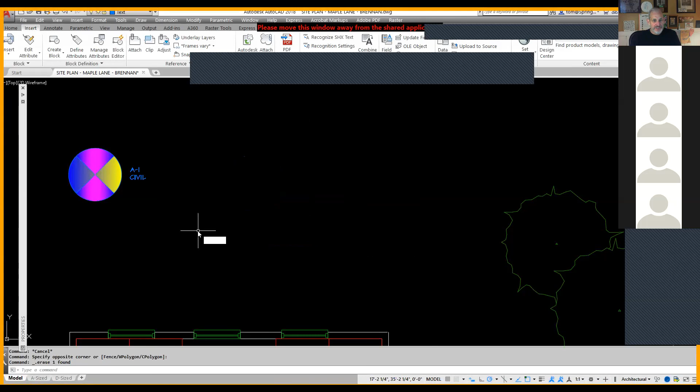I'm going to insert the others now. So go to insert marker, do another one here, drop this one, and I'm going to name this one A-2. And this marker use is actually going to be boundary. I go ahead and hit OK, and boom. So that's how you go ahead and do this.

Now, once you've got that, this information can then be used throughout the AutoCAD database. This is actually kind of cool stuff. So that's what attributes are - pretty straightforward. So what we're going to do right now is see how to use attributes. First, I'm going to show you how to use them on a title block, and then I'm going to show you how to make them.

Okay, so we're going to do this, this is the next thing. Now that we understand what they are, I went through those basic steps right here. And again, it's up here, define attributes - this is how you do this. You save it along with me. Any questions about what I'm showing you so far right now? Any questions about this?

I'm just glad you got the video. Yeah, okay, the video is going to have all this right here. Okay, so we're sharing it, and actually we had the little 5-minute break in there too. Oh well, life goes on.

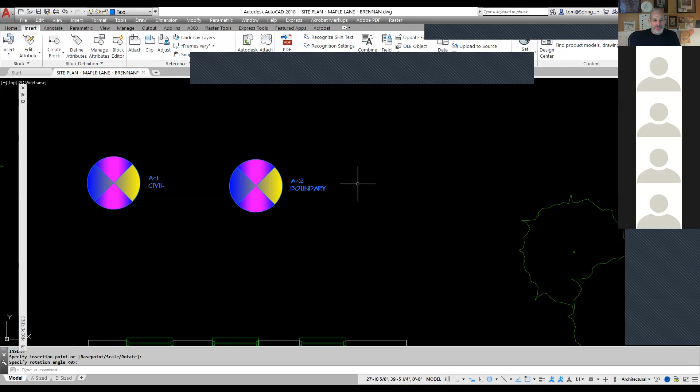Okay, so now I'm going to go to A size right here. You're going to notice that right now I've got a basic viewport, and there's not much information here, but I'm going to double click inside here. When I do that, it shows me all my information, okay?

Now, let's say I want to go ahead, this is called a viewport. I double clicked inside of there, and I've got 2 different things inside here. This is actually a pretty easy concept, let me just explain what's going on right here. This is called a viewport right there.

You don't have to do anything else except know it's a viewport. When you double click inside of it, that means you're inside the other area, so that means you can just pan and zoom like you can before. I'm just wheeling my mouse in and out. So if you zoom extents, it does that, and you double click outside of it, and you have that.

Now what I want to do is insert a title block. Okay, so a title block, we learned what a title block was. It is a means by which you track information about your drawing. So let me show you how this works.

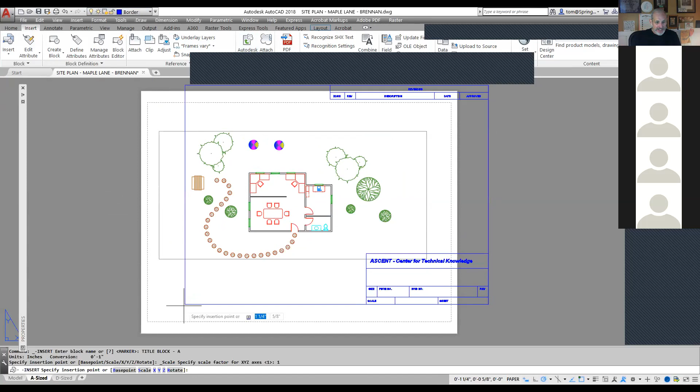So we're going to insert a title block here, and this particular title block is called title block A. I'm going to click on title block A, and I put an attribute on here. I'm going to drag this down to here, pull it right inside of here, so it's going to fit kind of nicely, pull it right inside there and click. And when I do that, I go ahead and drop it there, and then boom, it asks me to enter the sheet title, A-1. Actually, I'll just call this Site Plan Maple Lane, like that.

I think it'll fit, if it doesn't, I can change it. Site Plan Maple Lane, there it is. So I've got that right there. Boom, I just went and put that information in. That is how you would use attributes inside of a title block.

That one's already been done for us, so that one's pretty straightforward. Okay, so we have that right there. Site Plan Maple Lane, we got that right there. Okay, so I'll show you that one more time.

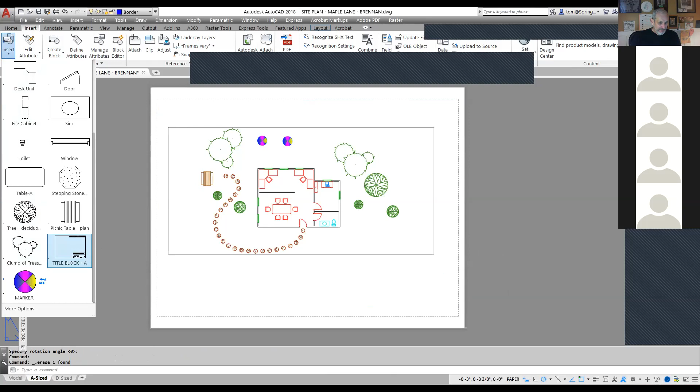Okay, all I did is inserted it. I'm going to go ahead and just delete that, and what I'm going to do is insert that again. So I go to Insert, Title Block A, and I can go ahead and just pick a point right here where I could say 0,0. They both work. And then I go ahead and rotate this around.

And then when I drop it, it asks me for the sheet title, and I say Site Plan Maple Street, Maple Lane, like that. And then I hit OK. And that is how we put this information in.

Then it can actually be tracked throughout the database. That's actually very powerful, so that's what you would do when you put in a title block. That's how that actually works together. So that's basically it. Okay, now, attributed title blocks are very common.

You may find in the organization you wind up working with that you'll actually be able to put this in here. But remember, it's just a block with these attributes put on it, that's all it is. So now here's the assignment.

Okay, so going back to here, we are now going to put in some attributes, and this is actually how we're going to do this. So moving to the next thing here, we're going to define some. Okay, so I'm going to go back to here, and this is what we're going to do.

We're going to put them on the D-sized title block. I've got this D-sized title block right here, and again, I can double click inside here, and I can zoom to extents inside here like that. I can zoom inside there, and what I'm going to do right here, and by the way, you have 2 different things right here.

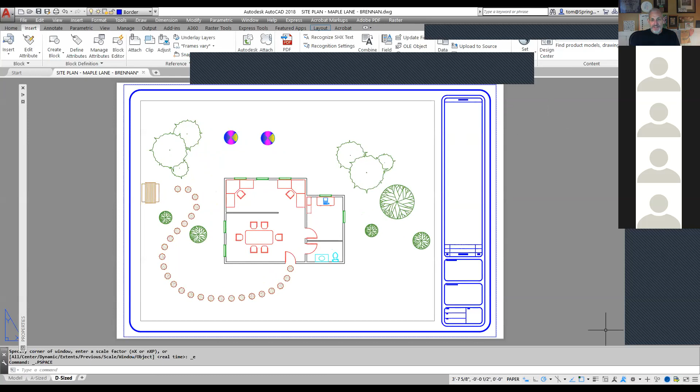You'll notice that, and this is something I want to point out before going any further. This is something you guys need to feel confident about as far as what you're doing right now.

The other space, if I double click here, is called model. Model space looks like this, and the triangle is now missing, but you'll see this icon right here. So what you're doing is actually working in the model, which is the black background area, only you're doing it through the paper space window. That's what's going on right there.

So what we're doing right here is we want to stay in paper space. We don't need to do that right there. So we go back to paper space, and now we're in paper space again.

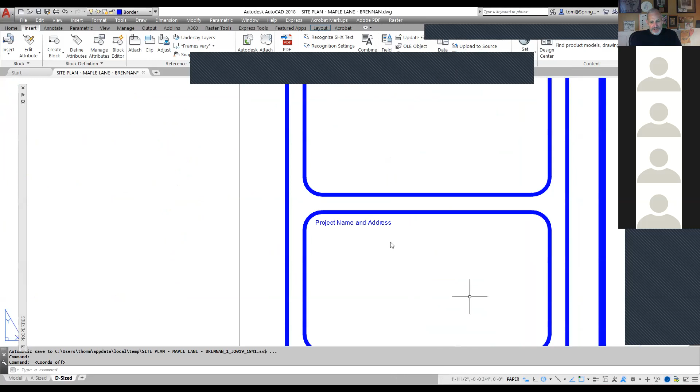And now what we're going to do is go back over to here. What I'm going to do right now is put in what are called some attributes. You'll notice there are some attributes I want to have down here: sheet, project, date, and scale. So I'm going to put those in. Let me show you how they're going to look.

So to look at this right here, I'm going to show you what we're going to work on right now, and that is back over here to the sheet I was working on.

Mr. Galusha? Hello? Yes, I was wondering, because we weren't able to see AutoCAD when you did that paper space. Oh, you weren't? Okay, yeah. Got to tell me if you're not seeing where it is on the toolbar. I'll show you again in a second. Are you guys seeing? Okay, let me make sure you guys are seeing this. Make sure you tell me if you're not seeing it, because I don't have a visual cue as far as what you're seeing and what you're not seeing.

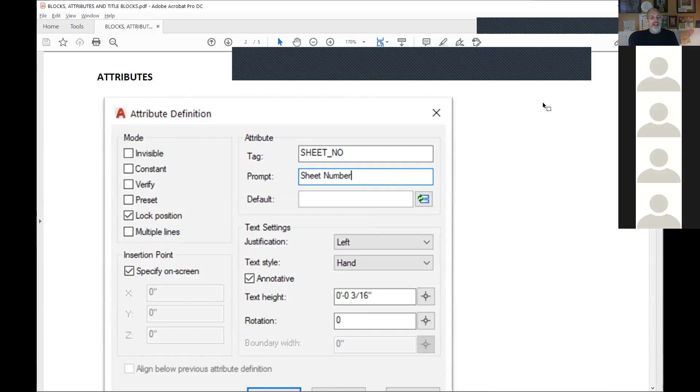So it's okay, are you guys seeing this right now? Are you seeing where it says attributes here? Yes. Okay, and this is not too hard for you guys. This is actually pretty straightforward. Don't treat it like something too difficult. It's really not. You guys can all handle this. This is something that's commonly done in AutoCAD.

It's not that hard. Okay, so what you're doing right now is your attribute definition dialog box looks like this. I showed this before. This one's going to be sheet number, sheet NO. And by the way, for the tag you can't use any blanks, so that's why I have sheet underscore NO for sheet number. Okay, we're going to do that.

And then down here you have a few more: you got project name, then one called date, and then one called scale. So we're going to make those four attributes right now.

So I'm going to make those four attributes, sheet number right here. Let's start with this. So I'm going to go back over to here, back to AutoCAD, and go ahead and work on this. So back over here and into AutoCAD.

Can you guys see AutoCAD now? Yes. Okay, so I'm going to do this. I'm going to change my layer to 0. And then over here, what I'm going to do is work on sheet one right here. I'm going to go to sheet, and over here I'm going to define attributes, which is right here. So I click there and it brings this up. So what do I want to do?

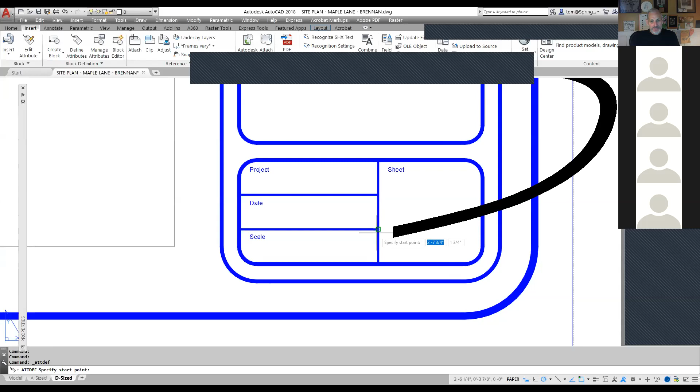Sheet underscore NO for sheet number. So I'm filling this in. Now watch what happens when I hit OK. I hit OK and I drop it. Look, that's way too large. I don't know why, let's try that again.

Now my height right here is going to be what? That's 3/16 of an inch. So that's what it shows. You guys have got this data right there, 3/16 of an inch. So I hit OK and watch this, I drop this right here. Boom, that's it, that's all you do. I just place it in there. That is an attribute, it says sheet.

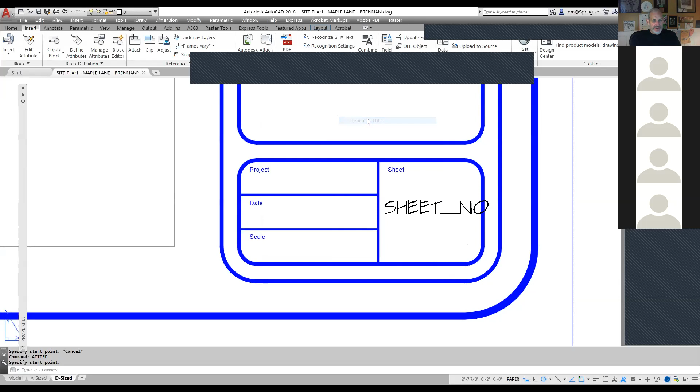It's in place. So now if I right click my mouse, I can repeat it. And this next one is on the sheet, it's project name.

And then down here, like that, and then I'm going to go ahead and hit OK again. Oh, may not contain spaces. See? Okay, that's why, so I got to do that. So I hit OK, I'm going to drop this right in here. And boom, I dropped that there. So I can make another one.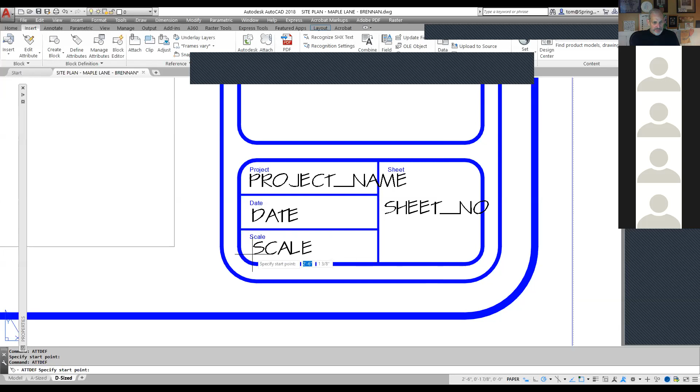And then the last one, you can do one more, and then this one is going to be called scale. And then down to here, and hit OK, and drop this one down here, like that. Okay, so I've got these in place right there.

So now that I've done that, I've got project name, date, sheet number, and scale. Let me go over here and show you something here. This is what it's going to look like when you get this all put together. Okay, so you put this in sheet number. Can you guys see the attributes right now, this definition dialog box? Yes.

Okay, so you're going to do this, and you're only just changing the first couple items, tag and prompt, and then you're just clicking a point in the drawing. Once you got those, when you put them all in your drawing, when they're all complete, it's going to look like this. When it's all in, they're all going to look like this. But for right now, when we put them in, it looks like this. So it looks like this right now.

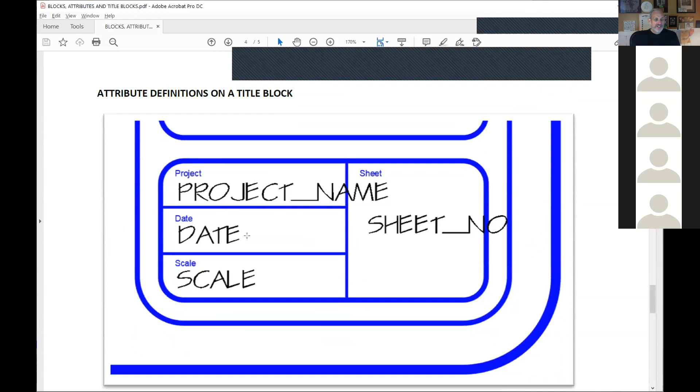That's how you know you got it right. So attribute definitions on a title block is right there, and what we're going to do is when we save this all together, it's going to look like that. So let me show you this. What we're going to do is we're going to go back to AutoCAD, and I'm going to show you how to make this work.

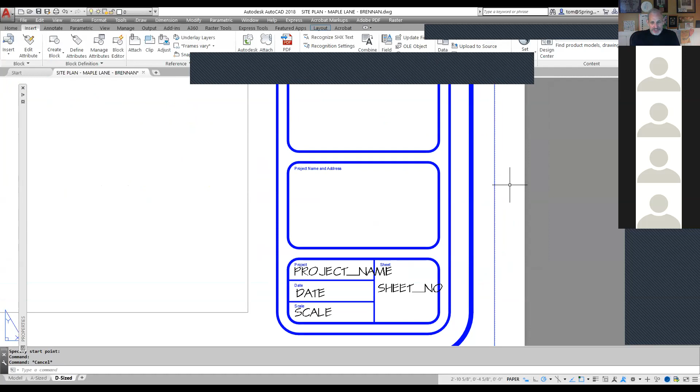So to make this all work, we're back to here. Now the only thing we got to do right now, you've got this right here, you've got this, this right here. And what we're going to do is we are going to go ahead and we're going to name this a different thing. We're going to call it title block D. All right, so how do we make a block?

Well, I think we've learned how to do that. We go here to create a block, create a block right here. Okay, create a block, and this one's going to be create a block, and we're going to create a block, and we're going to name it title block D, title block D.

I'm going to do this. I'm going to specify a base point, which is going to be the, I'm going to pick the point rather, which is the lower left corner down here. And then I'm going to select my objects, which is going to be this.

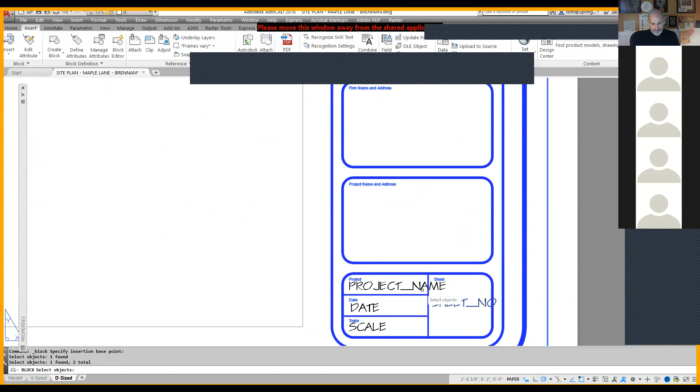And then I'm going to go ahead and pick on these items here. I think this will all work. I think it should: sheet number, project name, date, and scale. Hit my enter key, boom, see if it likes this.

And by the way, I have it on delete right now, and the reason why it's still giving me a visual cue that it should delete when I do that. So I hit OK, boom, it deletes. Okay, so that's all gone right now.

Okay, so now let's see if I can insert it, and if I do insert it, if it works right. So I'm going to go ahead and change this right now. You always got to check your work. You always got to make sure it's right.

Let's see here, can you guys still see my information here? You should be able to, yeah.

So I'm going to change my current layer to border. Why border? Because border is where we put our title block. So we go to border, and what I'm going to do right now is go ahead and insert this.

So I go to insert right here, and I'm going to go to title block D. Boom. And the insertion point, I can click a point somewhere down here or type in 0,0. Boom. And then I go ahead and rotate it. Now watch what happens when I do this. Boom. And now it asks me, what's your sheet number?

And I can go ahead and put in these values. And the sheet number we see right here, it's actually right here on the attributed title block. So it's going to be S-1. And the project name is going to be site plan.

And the date is 4/2020. And the scale is going to be 1/4 inch equals a foot. So we'll go ahead and put that in there, 1/4 inch equals 1 foot, like that. And I'll hit OK. Now watch what happens when I hit OK.

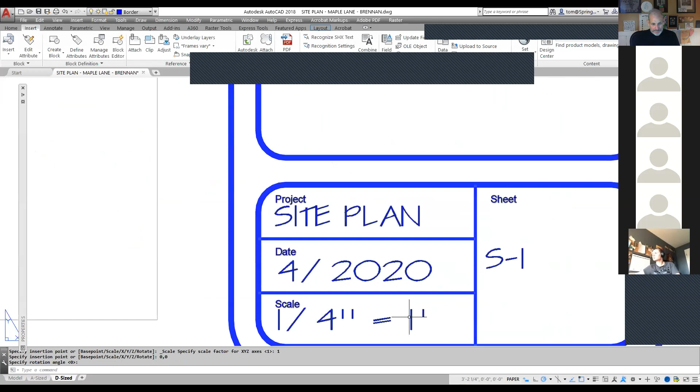Boom, and look at that. It just populated information in there, okay? So rather than just putting in text that's just without any kind of information to it, we have now used the AutoCAD database elements to put this together. That is how you made an attributed title block. And you can actually make a lot of money just doing this for people right here. I've done it, so that's actually something you can do. Not that hard to do.

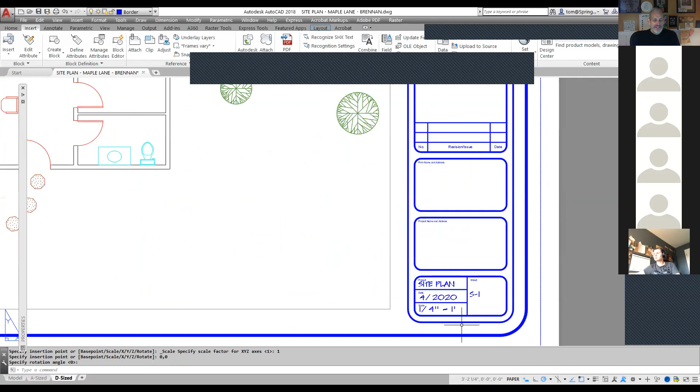Okay, so I went ahead and did that. Just to repeat those last couple steps right here: if I go ahead and drop it out of here, get rid of it, and insert it back in. I go to insert it, title block D, I'm going to say 0,0, boom, and I'm going to go ahead and jump it in like this.

And then it asks me, okay, S-1, and then the project name is going to be site plan. And then down here, the date is 4/2020, and the scale is 1/4 inch equals 1 foot. And I hit OK. Now when I do that, it looks like that right there. It all comes in and you're in good shape.

Okay, so everything I've showed you will work like that. Now, here's something - last step that you want to do is make this particular viewport to be the same scale. So I click on this viewport. When you click on this viewport... that's interesting, okay, it's not giving me that.

Okay, so why is it not giving me that? Huh, must not be in 2018. Okay, so I'm going to double click inside here. Now when I double click inside here, what I just did is I just made paper space no longer working, and I made model space working.

So back to here. Over here, you'll notice that right now I'm in paper space. It says paper down here, and it has a triangle over here. That tells me I'm in paper space. So now I want to go to model space. To go to model space, you can do it one of two ways - you guys click on the word paper, and it turns it into model. That's the easiest way to do it.

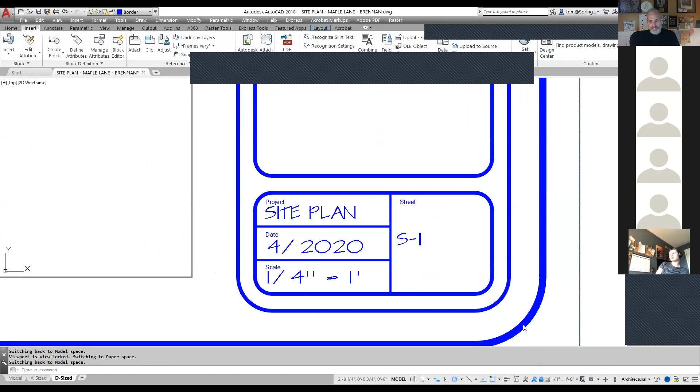So now you've got that, and that's what it should look like when you're all done. When you're all complete, the whole thing is going to look like this, like it shows in your last sheet. That is how we go ahead and make what's called an attributed title block right there. That's actually a very powerful thing.

So tying it all together, when you guys get this done, you are going to insert it. It's going to look like this. This is what you're going to insert. You're going to have your title block around your drawing right here. It's going to look like this right here. So that is what you're going to do.

So yes, all the minutiae that I just covered will be part of this whole thing, but the concepts are not that difficult. You guys can do this, but these are blocks. You've already worked with blocks. They're attributes, which is something new, and they're attributed title blocks. So you put them all together and you're good to go.

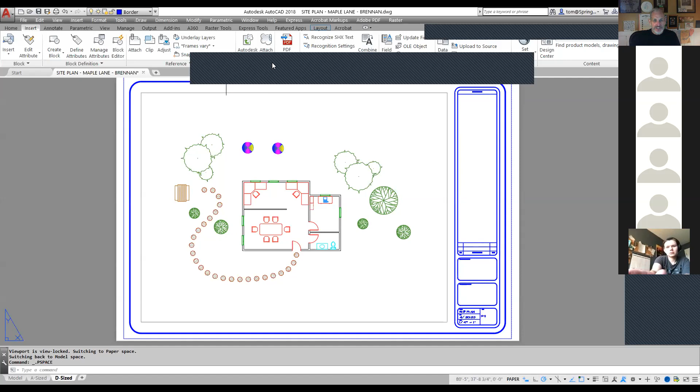And again, we're going to step through these things just like you see here. So what we're going to do is go back over to our sheet. We go to our sheet right here, and just to go through it bit by bit, we're going to do these things. We go back to the beginning, and this is a sheet you're going to download that's on Blackboard. The first thing you're going to do is take this item right here. You're going to download the template and populate it with the blocks that you see right here. You're going to go ahead and do that.

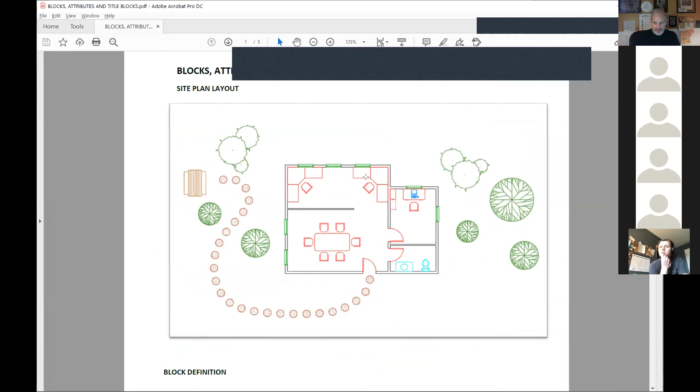Once you've done that, you are then going to make a block called marker using the same steps that I did before. Again, just a circle, lines, and a couple of hatch patterns. You're going to go ahead and do that. And then you're going to define attributes, okay? You're going to define the attributes just like I showed you.

And everything is going to be on the video. So we've got this right here, and then I'm going to continue on down here, and you've got these attributes, and then you're going to basically put your attributes in, and they're going to look like this when you're all done. The whole thing when you're all done is going to look like this, and this is what you're going to turn in.

You're going to save this as site plan-maple lane, site plan-maple lane with your last name, and then you're going to turn that in. It's going to look like this. So that's it. And you're going to be doing this by working on your layouts right here.

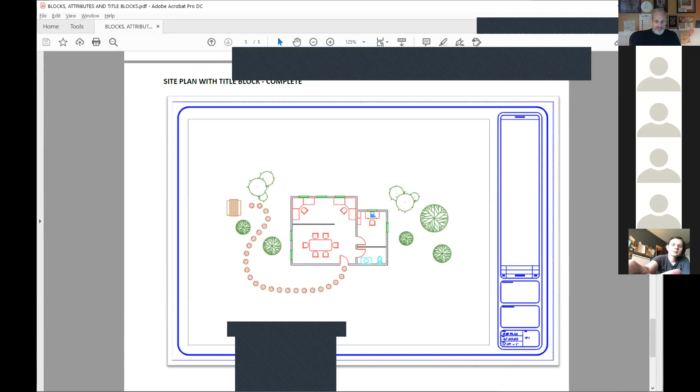So just to show you what's going on with AutoCAD, as we're going over here and working on this right here, you'll notice that we had this over here. So you've got model, and then you've got an A size. This is called a layout right here, and a D size layout. Okay, so that's basically how you get the white backgrounds right there. So you got this, and you got this. And that's how you find all that information. And that's it right there.

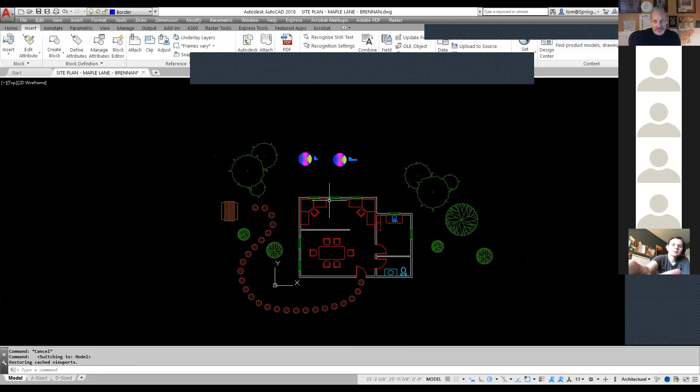So that's the assignment, and that's what we're going to work on, and that is all it's going to be for this week. This is what we're going to be using in the future to actually finish our last project, and we're going to be putting title blocks around each of the different sheets. So we actually put a whole thing together here.